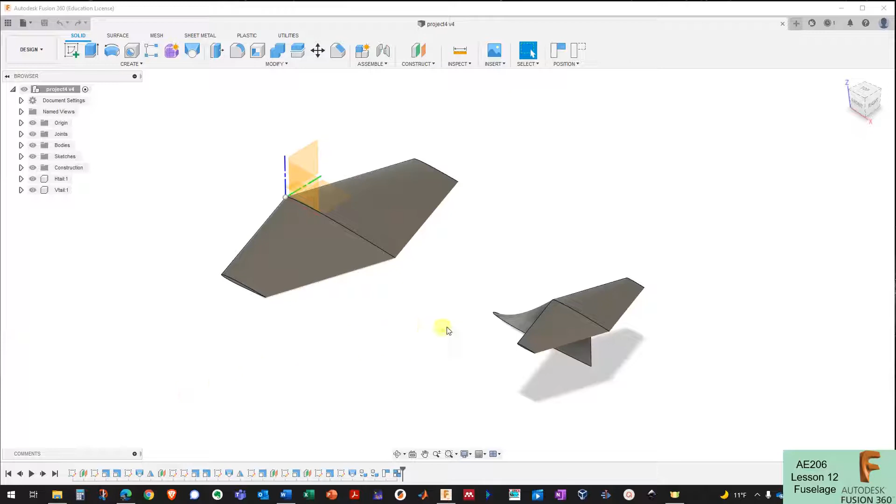This is part 3 of Project 4, where we're going to take the wing that we made in part 1 and the tail that we made in part 2, and we're going to add a fuselage and create something that looks like an airplane so that we can get it ready for 3D printing in the wind tunnel.

The basic tool that we're going to use to create a fuselage is the Forms tool up here, and we can click on this Create Forms button. We can click the plane that we want to create it on here. I'm going to create a cylinder, create the center of the cylinder, set the diameter, and then elongate the cylinder. This is the basic starting point that we're going to use to create our fuselage.

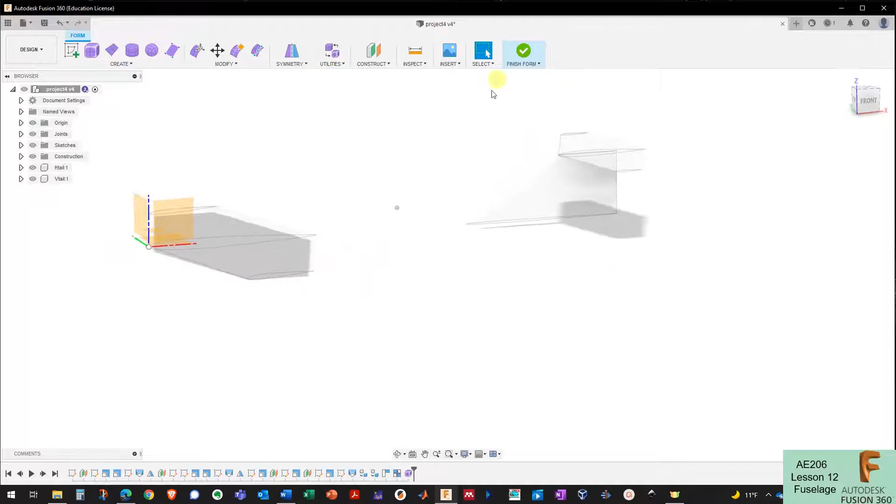Before I get into that though, I'm going to try to get my wing and my tail in a good position. I'm actually going to go for a replica of an F-104 aircraft, so I want to have some sort of reference to use to know where this wing and tail should go for an F-104 type layout.

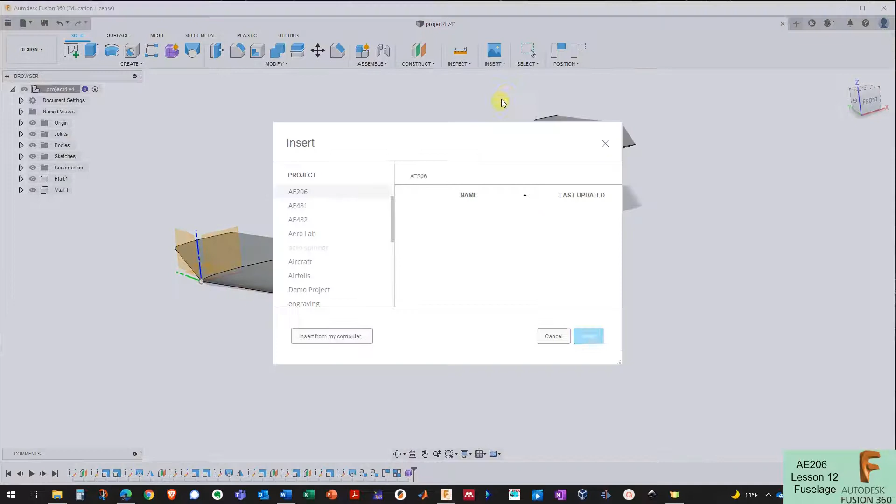I'm going to go up to the insert menu here, and I'm going to insert a canvas from my computer, and choose this F-104 3 view that I have here, and put it on this plane right here. I don't see that picture anywhere because it's really tiny, so I'm going to grab this scale handle here and drag it a few times until I start to see that thing get big enough.

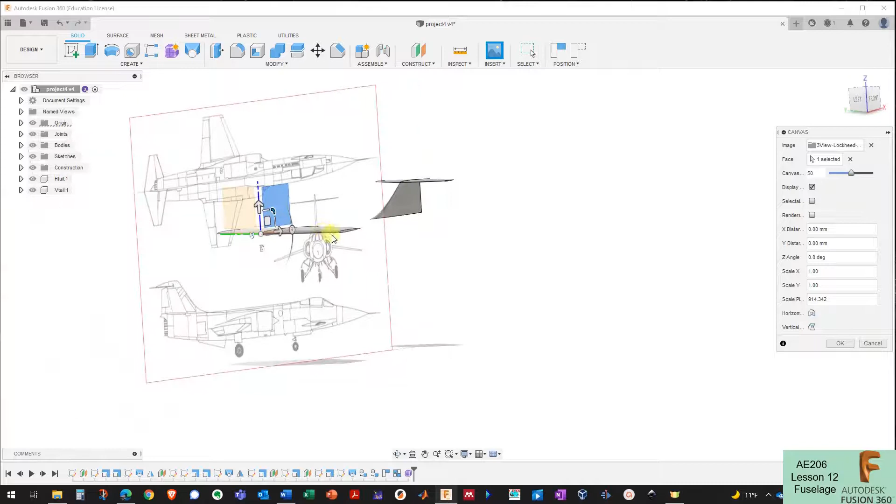I'm going to use it as an outline for sketching, and I want to flip it around horizontally so it's pointed the same way that my model is pointed. I'll press OK. Now the cool thing about this canvas is that we can calibrate it.

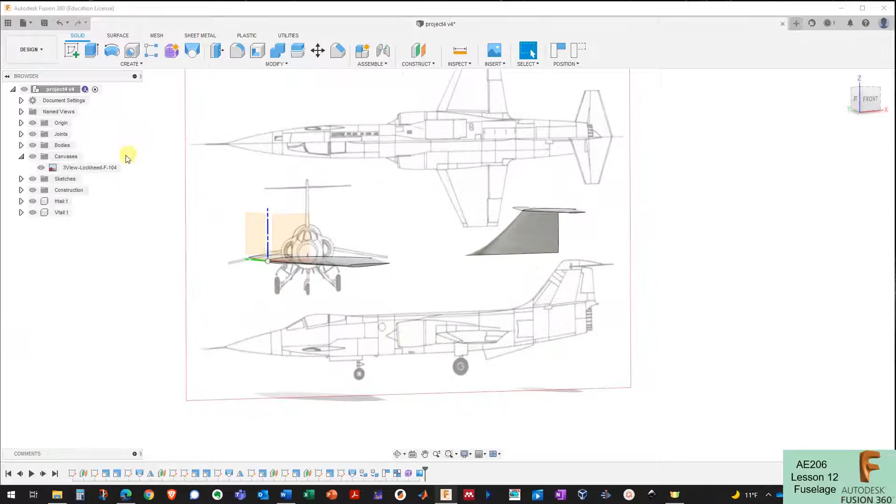You'll see I've got a new thing here in my model tree canvases, and here's my 3 view of an F-104. I can right click on this and click calibrate. Using a wingspan is a really good way to calibrate an aircraft.

I know the F-104 wingspan was 21 feet 9 inches, I'm going to call it 22 feet. So I'm going to click on one edge of the wingtip to the other edge of the wingtip, and now I can calibrate this canvas so that distance is a certain distance. I'm going to type in 22 feet. Close enough. Now I know this canvas is calibrated to a wingspan of 22 feet.

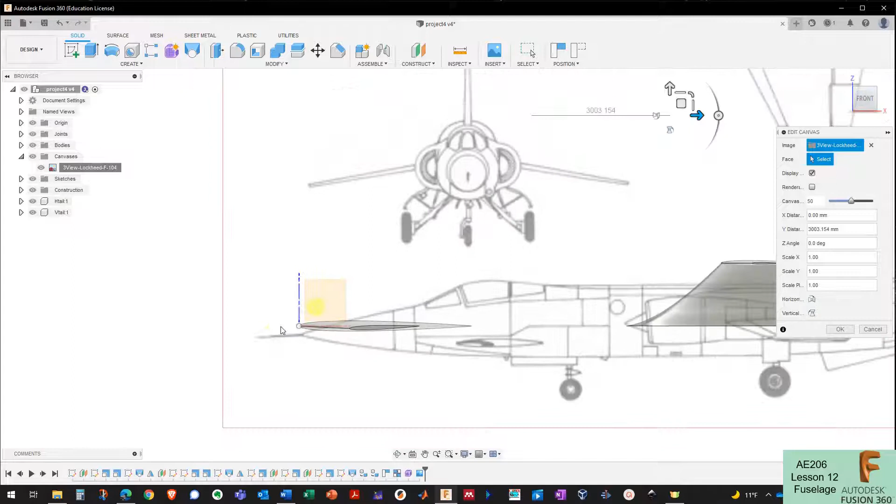So I'm going to right click on it, edit canvas now, and move it into position so the origin is somewhat lined up with the nose of the aircraft, probably before that boom. So right about there. Now I can click on my tail here, and move it into position just using my canvas as a guide, and put it right about there.

You can see now that my tail, now that I've got it lined up to my canvas, it doesn't look quite like the F-104 tail. I didn't do too bad with that curvature in the beginning, but it is a little bit shorter than the F-104 tail, especially at the tip chord. It's a little bit shorter at the tip chord as well.

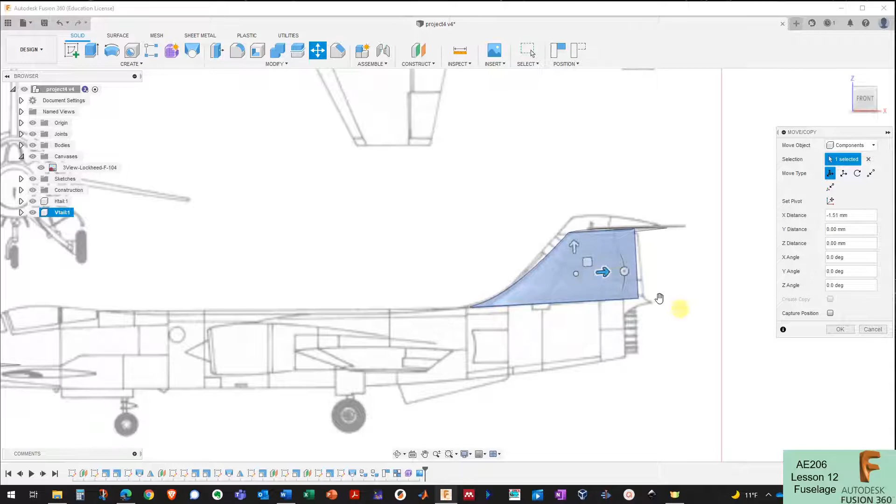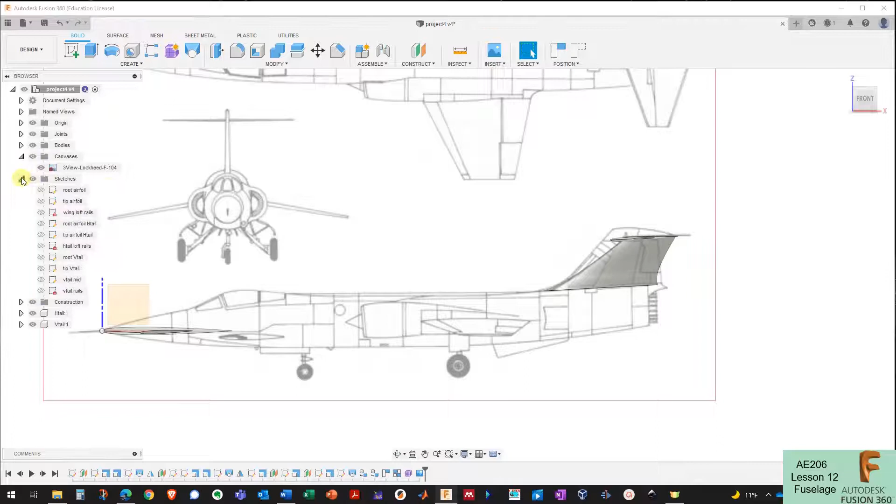So I'm going to line it up like that, and I'm going to modify, change parameters, and now I can change that tip chord of my vertical tail. So I had 4 1/4 feet here, I'm going to change it to 5, and it messed up the loft a little bit, so all I need to do is come back to sketches now and play around with this to fix it.

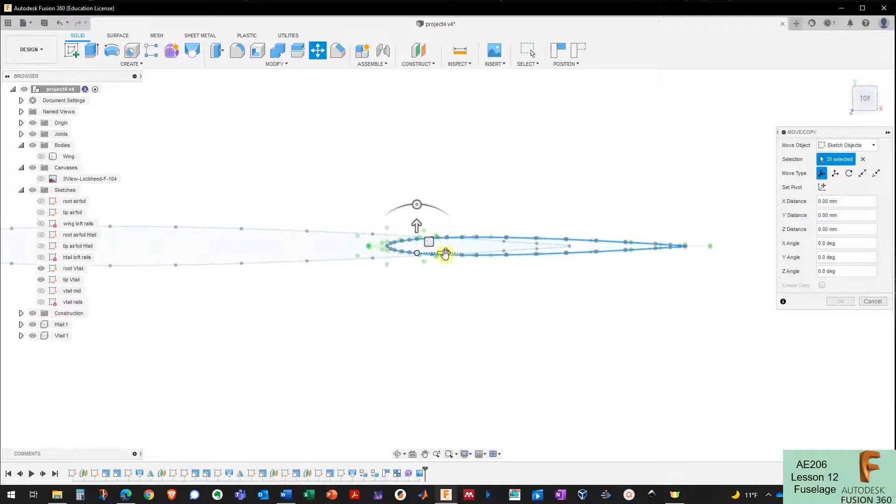I'm going to turn on my tip sketch and my root sketch, turn off my canvas for now, and turn off the wing here. Now I'm going to move this sketch so the trailing edge is lined up again right about there. Click OK, and now my vertical tail is looking a little bit better. I'll turn my canvas back on.

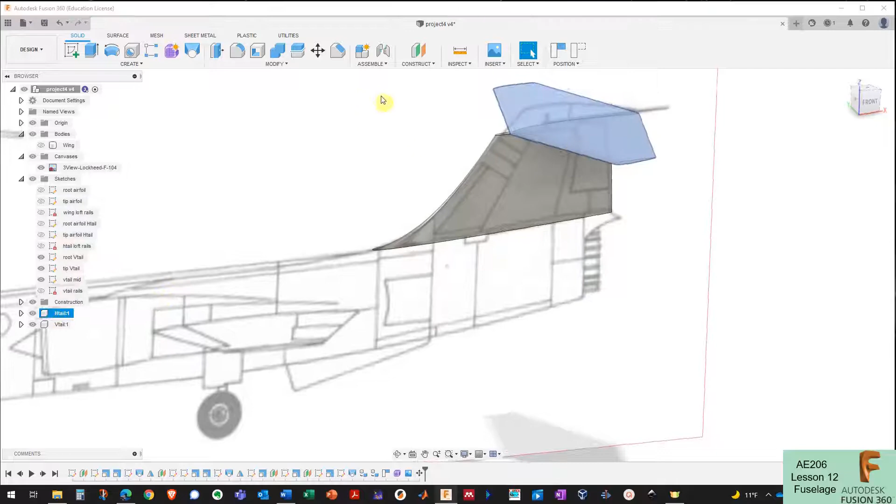Okay, so that's not looking too bad there. Now I just need to fix the top, the horizontal tail at the top. And to do that, I put these things in a rigid group. So I'm going to go back and delete the rigid group, select the horizontal tail, and try to move it a little bit.

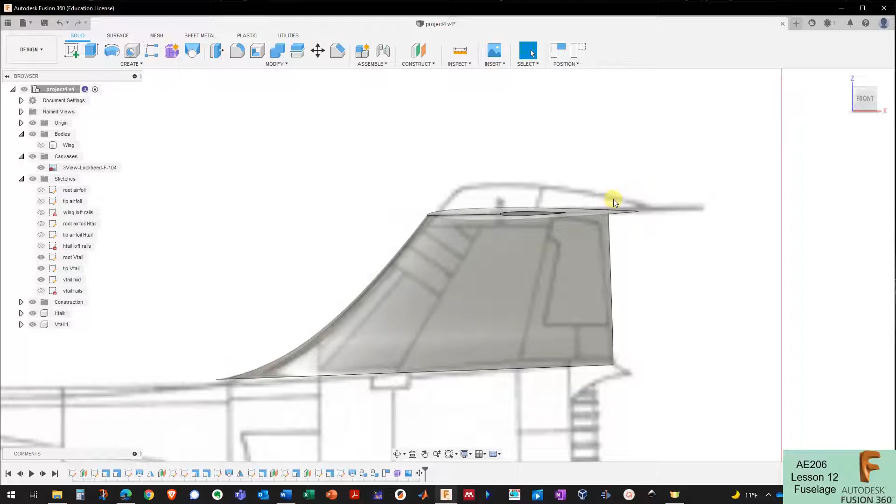Okay, so I've got the vertical tail lined up pretty well with the canvas. I'd have to find a way to model the top of this vertical tail. I could extend the vertical tail up and then use a sketch to cut off this curved shape, and then use some fillets around the top, and that'd probably be a pretty decent approach. For right now, that's going to be good enough.

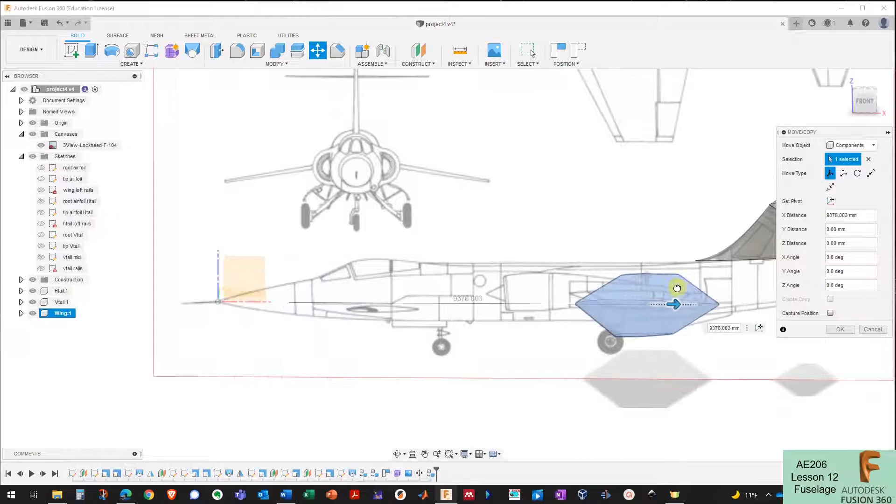The next thing I want to do is position my wing approximately correct. Right now my wing is still a body over here. I'm going to right click on this and create a component from the body. So now my wing is down here as a component, and now I can move it easier, and it retains its own origin and stuff like that.

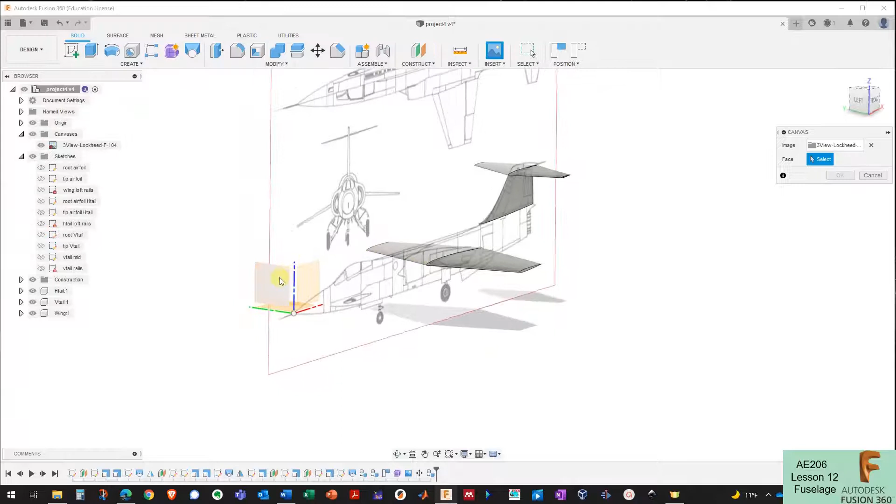So now I want to get the height of the wing right, and the anhedral, because the F-104 has anhedral. In order to do that, I really need a front view of the wing. So I'm going to go insert canvas, and insert that same drawing on this plane right here. I need to make it big enough to see, so I'm going to keep dragging this out until it's big enough. There I go right there. And I'm going to turn off the other one temporarily.

Now I'm going to edit this canvas just like I edited the other canvas, and calibrate this canvas. Okay, so I calibrated this canvas using this wingspan here because I know my wingspan was 22 feet. All I have to do is go back to my parameters and see that my half span of the wing was 11 feet, so the overall wingspan was 22 feet. So I know that's about right.

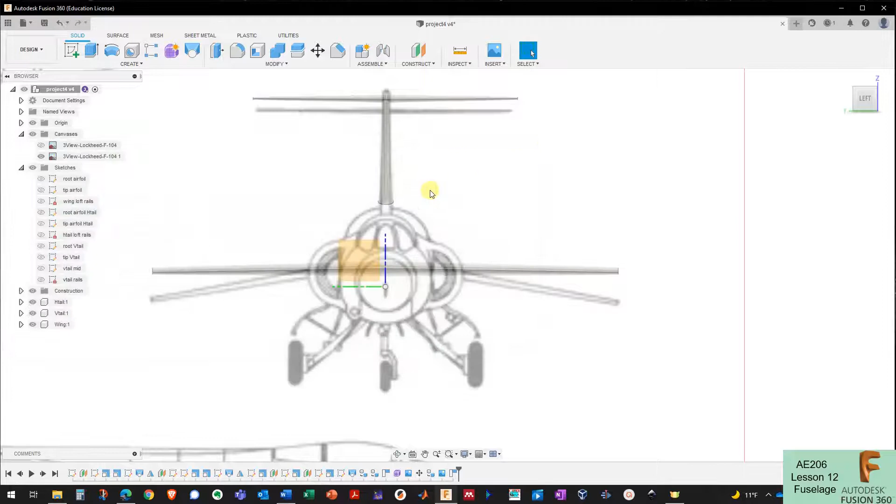And now I want to move this wing into position. So I want to get the wing root approximately right, and then correct the anhedral by moving the tip of the wing down. So I'm going to turn on my wingtip sketch, select it, click move, and move that wingtip sketch down until I get the anhedral that I'm looking for.

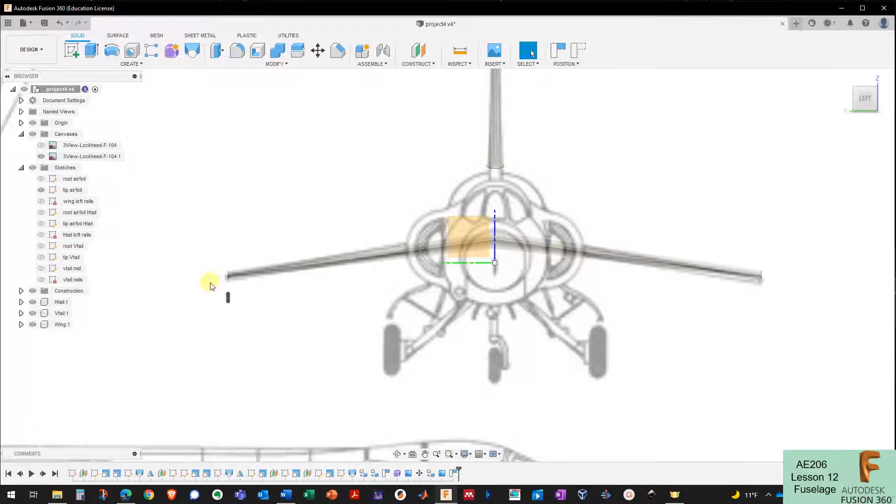It's just a matter of trying to match the canvas approximately, and that's looking pretty close right here. I'm not sure the canvas is lined up perfectly, but that does look pretty close. I'll go a little bit more on this side here, like that, and then I can actually move the wing.

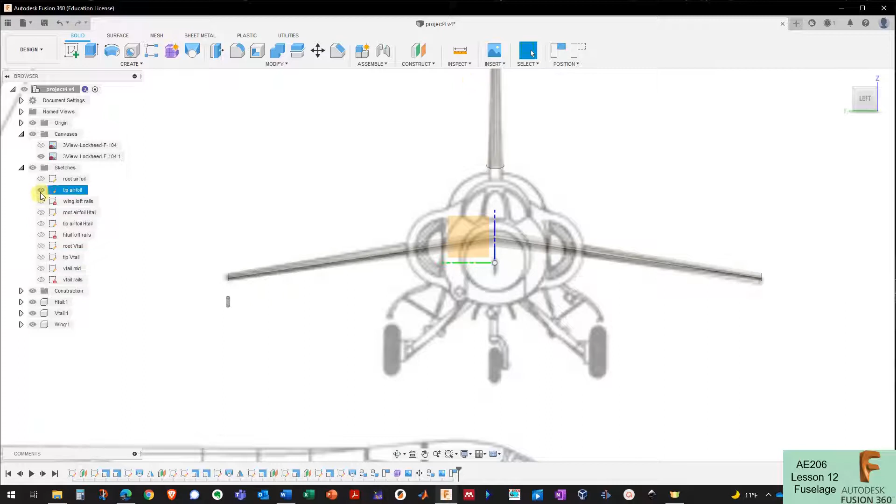I'm going to select components here, move the wing up a little bit, and I'll just tweak it one more time. Okay, it's pretty close to the anhedral there, so I'll turn off that wingtip sketch. So that's the wing placement I'm looking for in terms of the anhedral and the height of the wing.

Now the other thing I want to do is make sure the wing is lined up to the x-coordinate where it needs to be on the fuselage. So I'm going to turn off that canvas, insert another canvas, and use that same drawing because this is my one reference drawing. I'm going to insert the canvas on this plane right here and make it bigger.

I just need to calibrate this canvas. I'm going to make sure I have a perpendicular top view, then calibrate this to be 22 feet and move this canvas into position where I put the nose on the origin as well. And for my nose here, I'm just using the tip of the nose before the boom starts.

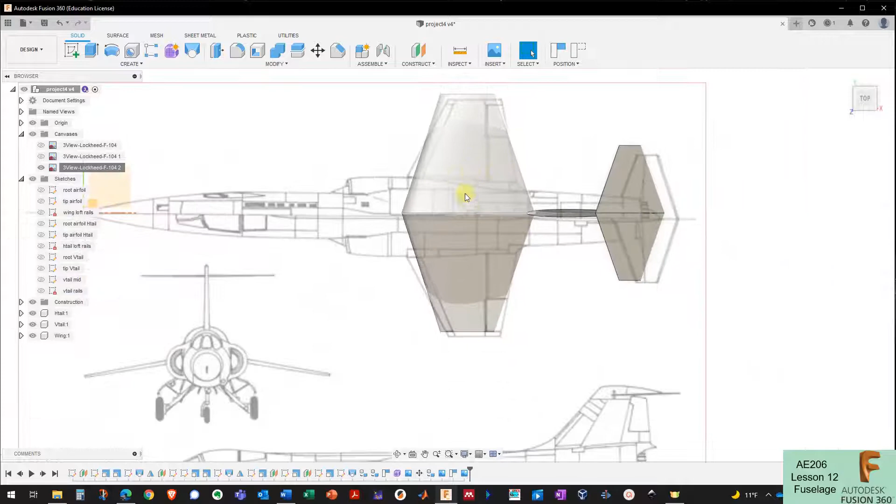So right about there. Okay, and now I can position my wing and kind of match it up with the F104's wing in this direction. And once again, it looks like the canvas is not lined up perfectly. So I'm going to edit the canvas again and move it so at least the midplane of the canvas is lined up with the midplane of the wing. My 22-foot wing is matching the 22-foot scale on the canvas.

And now I'm looking at my wing, and I think it needs to move forward a little bit. I think the root chord needs to become bigger to try to fix that leading edge sweep. So I'm going to change parameters, changing my root chord to 12.3 feet.

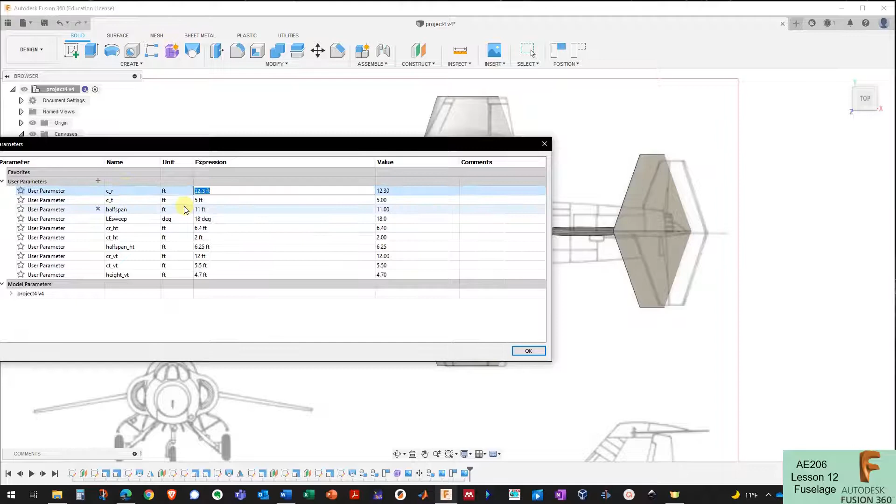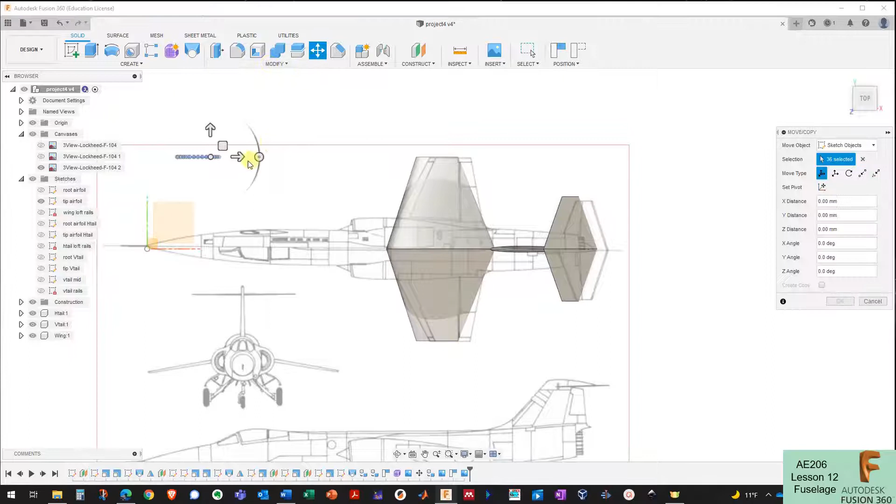Then I'm going to move the wing forward by clicking here, right about there. And now I need to change that tip airfoil sketch again. The tip airfoil sketch is showing up over here because that's where the original drawing was, but I'm just going to move it back knowing it will change the sweep on this wing, and that was pretty close.

And I think I can bring that root chord back a little bit. But I'm going to move the wing forward first. Yeah, I don't know, I think I'll just keep moving that sweep back.

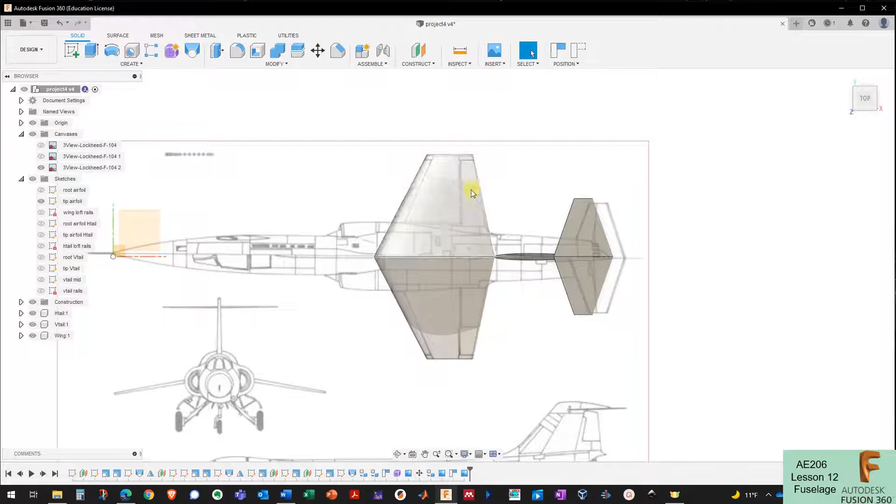Okay, that matches up pretty well with the canvas in terms of the wing placement in this plane, the XY plane, and the sweep and the wing span. If I turn off this canvas and turn on the canvas that's in the YZ plane and look at it from this direction, the wing lines up in terms of the height and the anhedral very well. So I'm pretty happy with the wing placement here, and I'm pretty happy with the tail placement.

I'm going to turn off that sketch that's showing, and now I can get started with inserting a fuselage here, a form, and trying to create the fuselage of the F-104.

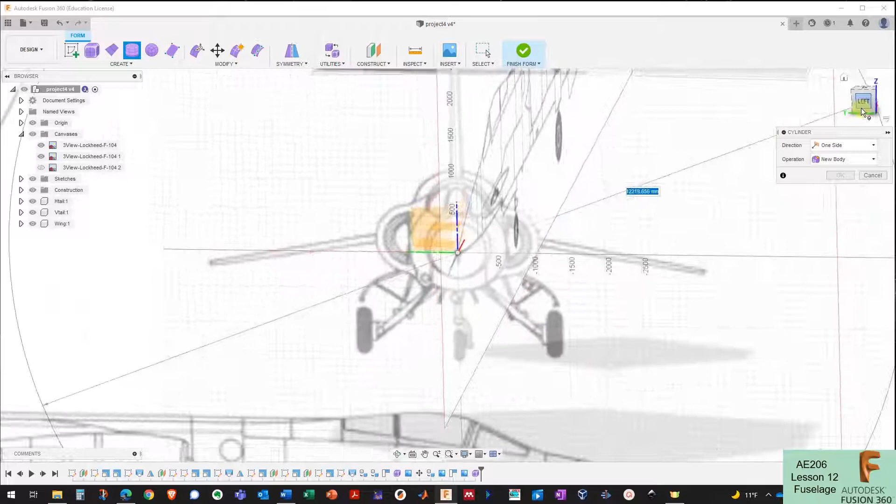So I'm going to go to Create Form, click on the cylinder button to create a cylinder. I'm going to click on the plane. I want to sketch the diameter of the cylinder on, and I want to turn on the 3-view drawing that has my front view on it, so I can get this diameter to roughly match the diameter of the aircraft. I'm going to force it to rotate the view by clicking on the corner of the view cube here, and I'm going to turn off that second canvas, and now I'm going to drag this fuselage back right about there for now. And now I've got my basic fuselage form.

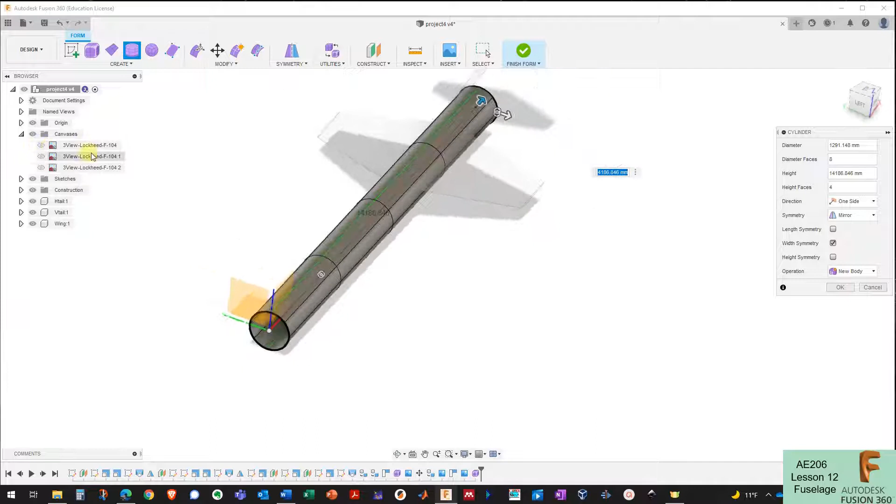Okay, now a couple things we need to make sure that we have set before we click OK here and create our body. First of all, I have these segments here in the X direction lengthwise, and I want a lot more of those because I want to be able to control the shape of the fuselage a little bit finer. So I'm going to put in 15 faces in that direction, and I can turn on symmetry as well.

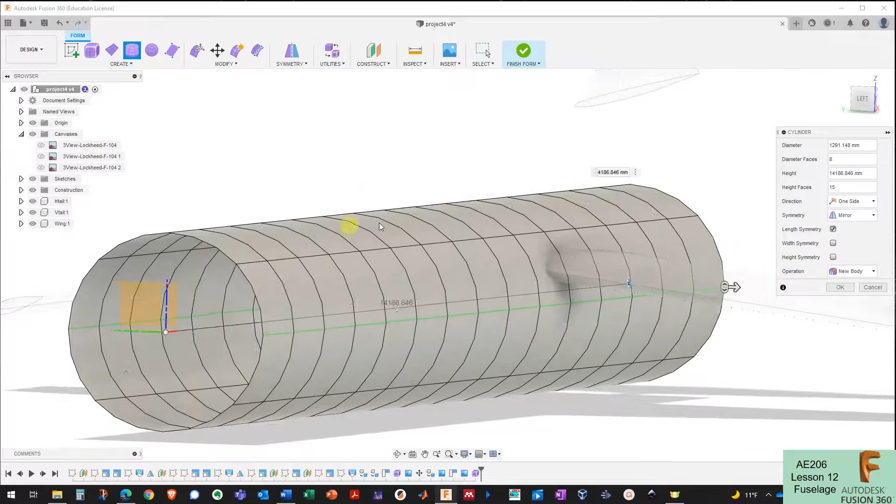Now there's obviously three planes that I could be symmetric about. If I clicked on length symmetry, I see that this line here is colored differently, so the top of this fuselage is going to be symmetric with the bottom. That's not what I want. If I click on height symmetry here, I see that this one is highlighted, so now the front of the fuselage is going to be symmetric with the back. That's not what I want either, so I click on width symmetry, and this is the symmetry that I want. So the left-hand side will be symmetric with the right-hand side.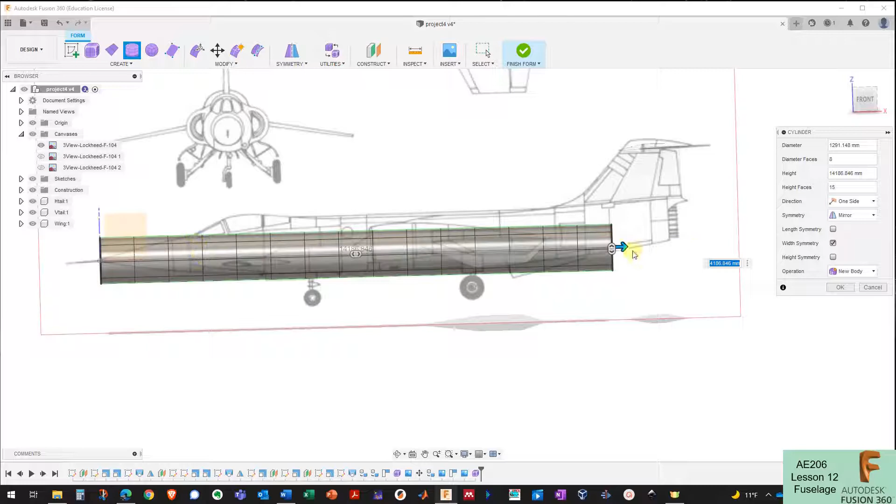So that's what I want there, and I'm going to make sure I have this roughly correct, and I know it's not full length, and that's because I'm going to move the whole thing back, probably line it up with this bulkhead of the aircraft here before I get started on too much. So I think I'm close enough now to press OK on this form.

And now I've got this fuselage form here, and I can get to work on shaping it into the fuselage. I'm just going to move it back for now and move it up slightly so it's level with the most part of the bottom of the fuselage.

Okay, so when it comes to forms, we basically have three main components of the form that we can manipulate. There's the face, and I've got a face selected here, and you can see when I select this face, because I've got this symmetry defined along that plane, it's also highlighting that the other face will be affected by anything I do to this face. So that's a face. There's also edges, so I can select the edges between two faces, and same thing here, it indicates that symmetry is on.

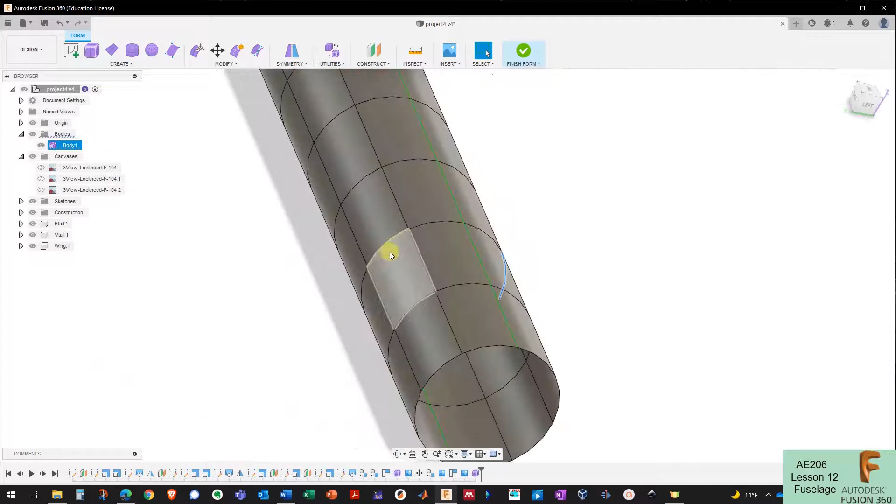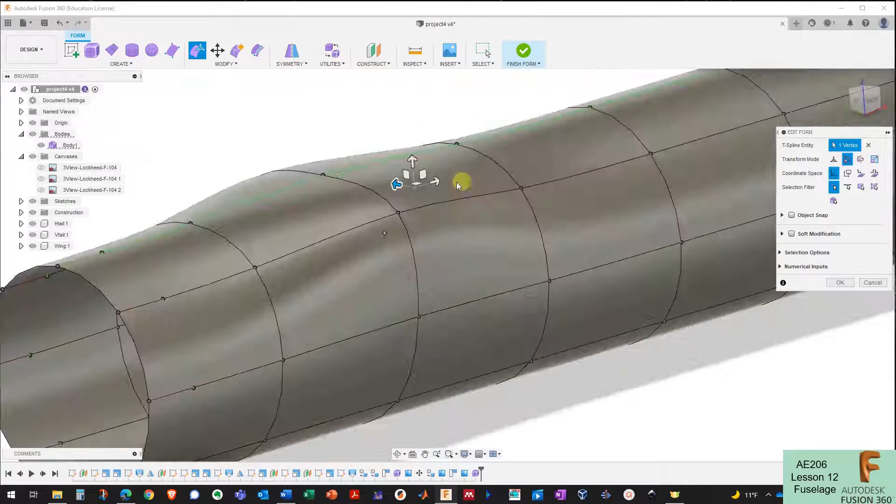And there's also vertexes, and I can select the vertex of these four faces here, and I can manipulate this vertex. No matter which one I choose, after I select it, I can come up to the Edit Form command, and now I can manipulate this by dragging, rotating, or scaling this component that I have selected.

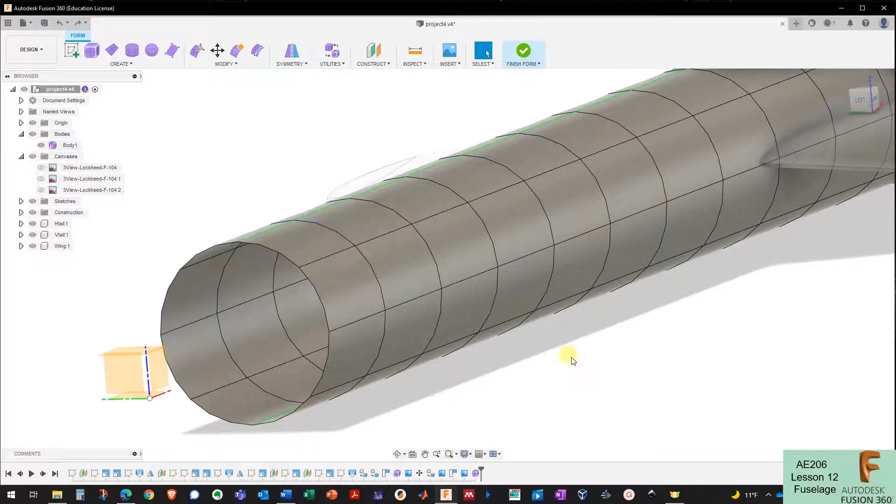In this case, I can't scale it, but you see whatever I did to this vertex, it did it in a smooth fashion, creating a smooth body, and it did it symmetrically about that XZ plane. So I'm going to cancel that and undo the change by pressing Control-Z, because I'm not ready to get into that quite yet.

The other major operation I can do here, and there's a lot of them under the Modify menu, you can just read about them and read the description to see more about what they do. But this crease one is important, because I could select some edges like this, and that creates a sharp crease there.

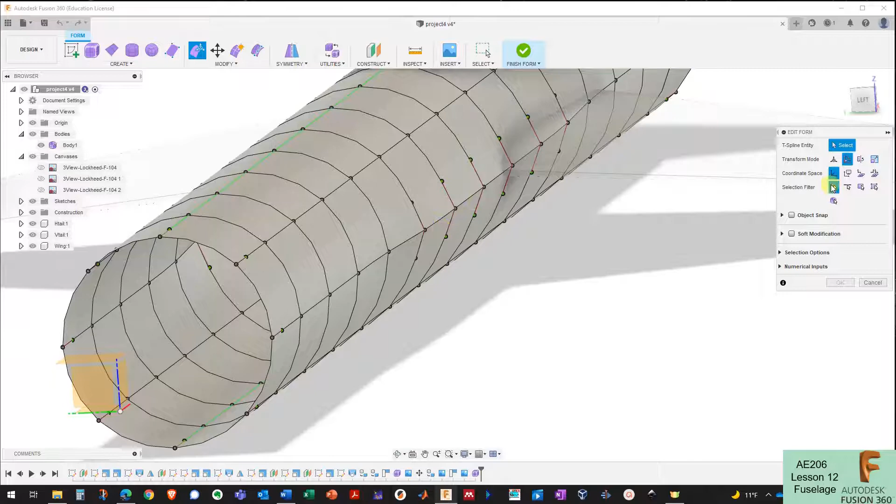I can select that crease, and right now I have my selection filter set to vertex, so it's highlighting all the vertexes I can select, but I can't select any edges, and I want to select edges. So I'm going to choose edges over here, and select these edges that I just creased by holding down the shift key.

Now I can pull those edges out, and you can see I'm making a chine for my aircraft. So if I wanted a chine on my aircraft, that would be the right way to make it, by creasing that edge and then manipulating it out. You could pull that chine forward or backward, whatever you wanted to do. That crease command is a powerful one. I'm going to undo that crease because I don't need it right now.

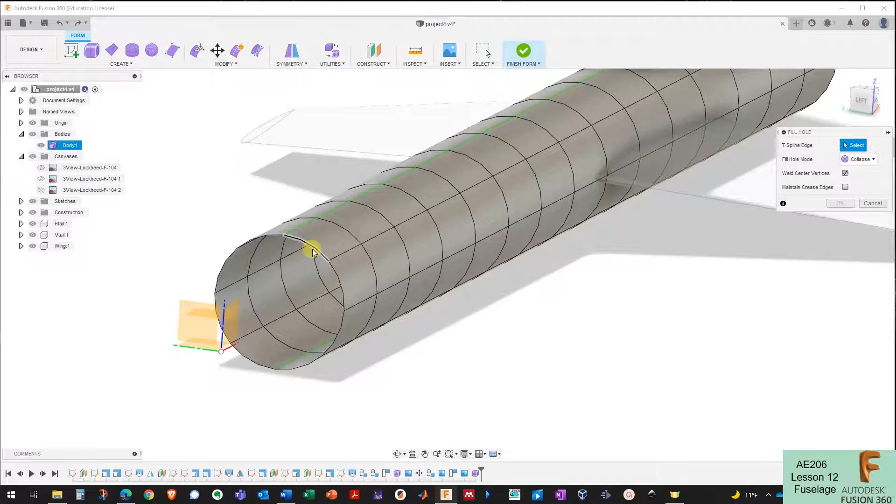Now, this cylinder is really just a surface right now, it's not a volume, so I need to close this in and turn it into a volume. I can do that by going to the Modify menu and saying Fill Hole, and I select an edge along this hole, and it automatically fills the hole.

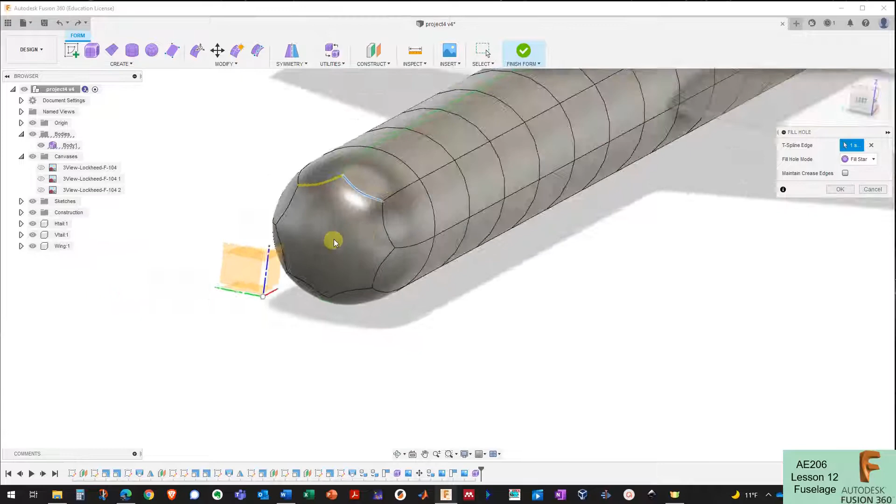Now it's very important that I choose the right method of filling the hole. There's three options: this Reduce Star, which kind of just nubs it over; the Fill Star, which is probably the most robust way to fill a hole, just because this shape doesn't result in any triangles. Triangles can get you in trouble when working with forms, and can cause a really jagged, unsmooth body.

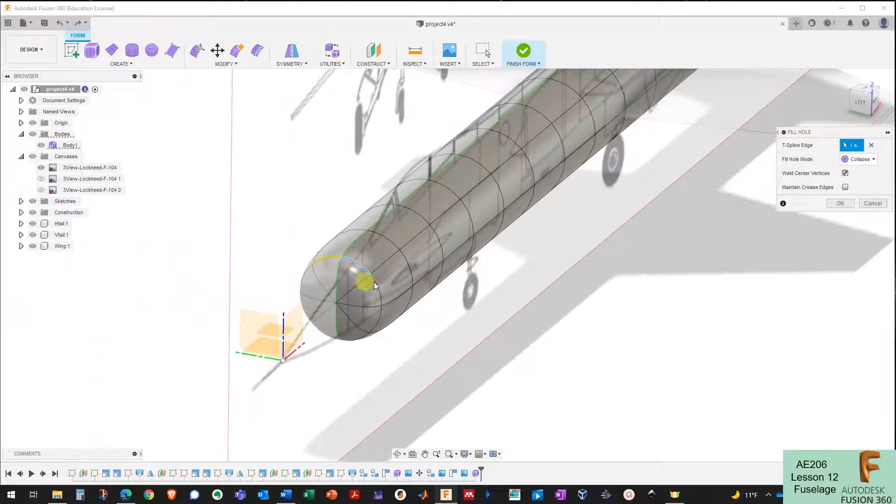Or there's this third option, Collapse, which results in triangles. But in this case, I need triangles because I want to pull the nose of this fuselage out to a point, so I want this Collapse option here. I'll press OK, and now I've got that side of the fuselage closed up.

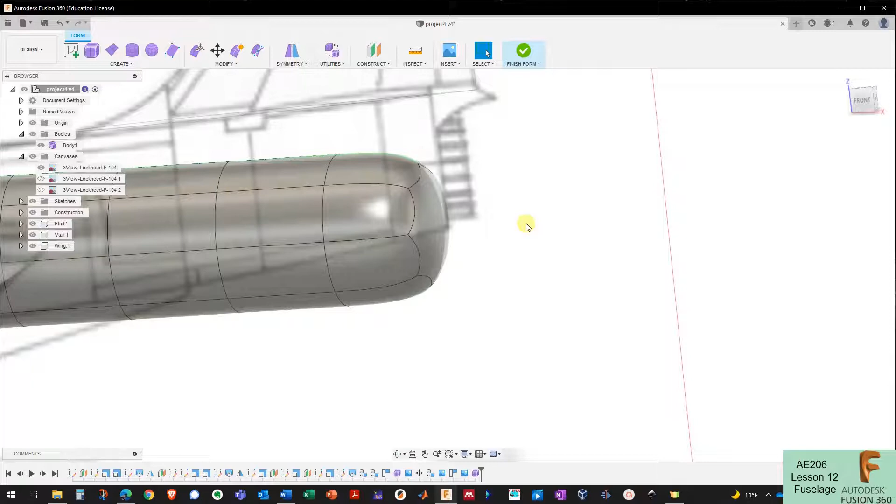I'm going to come over to this side, say Modify, Fill Hole, and click on an edge there. I want this one to be a little bit more robust, so I'll do Fill Star here, so I can manipulate it better without getting into a situation where I have vertexes crossing over each other, not lined up. That can be a tricky situation to fix.

Okay, so I've got my fuselage-looking thing here right now. It kind of just looks like a hot dog for the time being, but I can start manipulating this and turning it into something that looks like my canvas behind it. I'm going to do that now.

The selection box here comes in handy. I have window selection turned on, and if I drag from left to right, I'm only going to select the things in the box, whereas if I drag from right to left, I'm going to select everything that's touching my selection box. This is a really handy thing to keep in mind.

I'm going to select these two for now, and pull those back to right about there. That should be good enough for now. And now I want to pull this vertex out and make the pointy nose on the end.

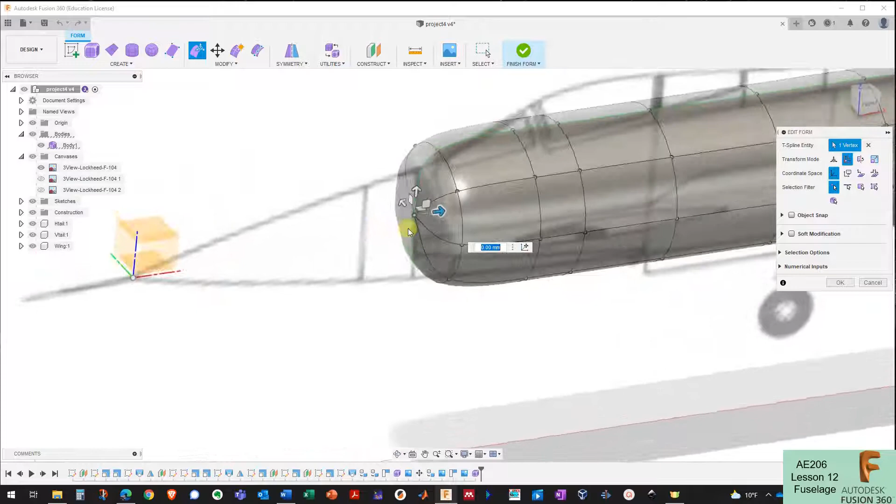So I'm going to go to Edit Form again. I'll turn on my selection filter to select vertex, and I drew a box over there, so I only selected the things inside the box. Now I can pull that out to make it kind of match up the nose of the canvas, and drag it down a little bit, and that's kind of a good point where I want that.

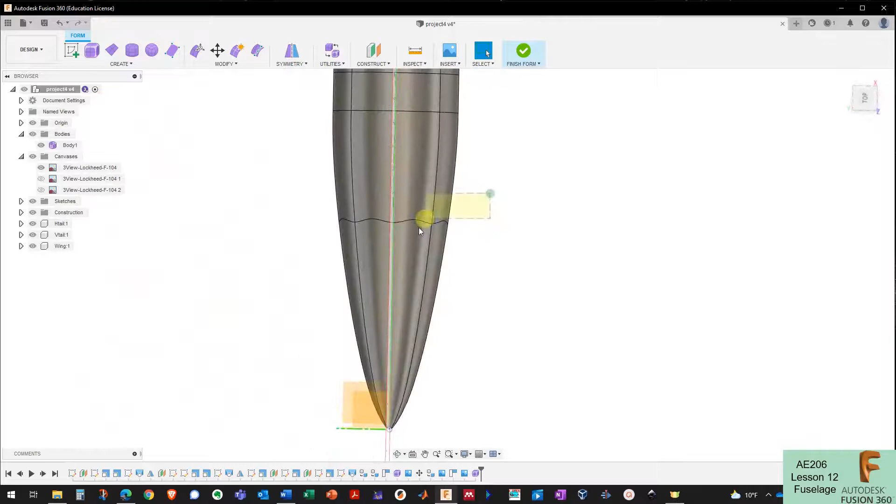Now I can check out these faces here, and I see they're all kind of wide right now, and I want to pull those in a little bit and make the nose a little bit tighter. So I'm going to select these here, and move those in.

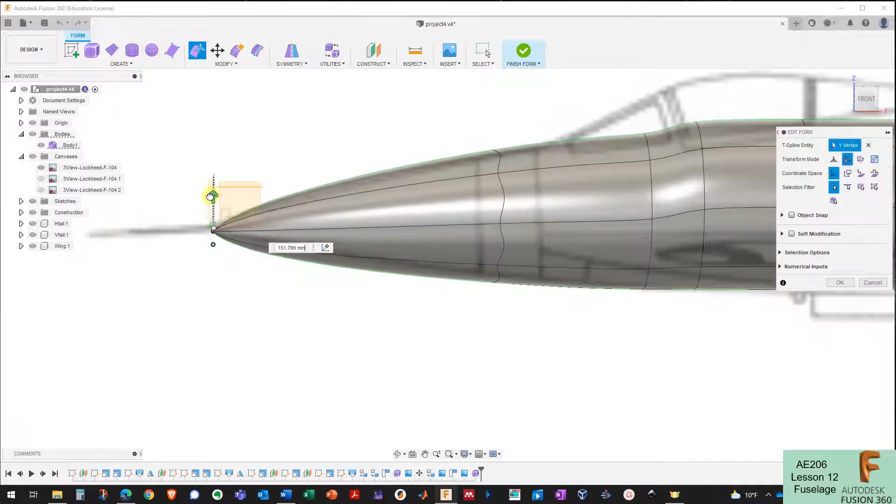Now I'm going to select the ones on the top and move them down right there. And now I'll select the vertex here and move that back up to where it needs to go.

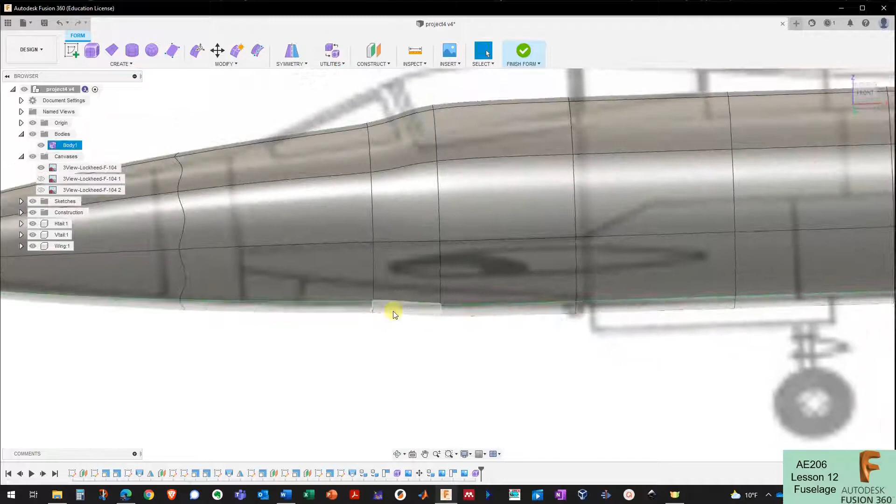It's not terrible. Okay, and now this is bent the wrong way here, so I'm going to select this edge, move it out a little bit to smooth that out, and we've got the nose of the aircraft approximately right.

Now I want to focus on the middle section of the fuselage here to there, and move that up until it approximately matches the top of the fuselage right there. Okay, so that's got the middle of the fuselage approximately right.

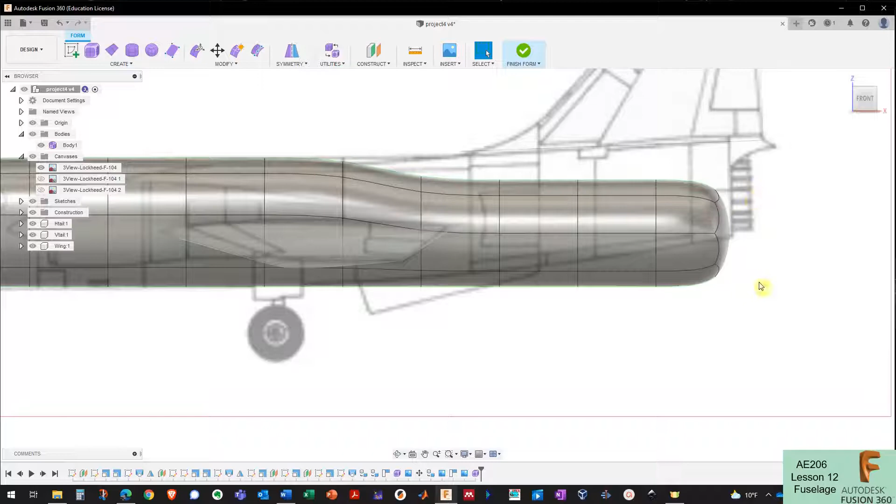Now the back end of the fuselage - I've got to do some thinking about this because the back end has this curvature towards the back. There's a different cylinder here that's the exhaust of the engine, a different diameter and stuff. So I think I'm just going to try to model this part with this spline, with this curvature coming back. Then if I wanted to, I could come back and put in another cylinder to model the exhaust. So the first thing I want to do is get this section approximately in the right area.

So I'm going to highlight it like this and click on Move. I'm going to move it up, and I want to do a free transformation here where I can also rotate it. I'm going to extend it past the end of the fuselage because I'm going to bring this end back inside of itself to make a clean hole at the end there. So that could be good enough for now.

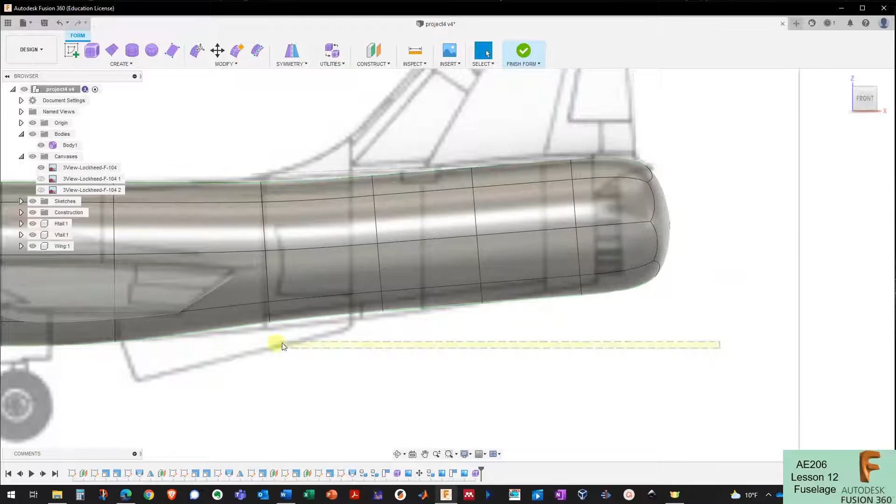And now I want to pull down on these faces here. I don't like how many faces I selected there, so I'm going to pull down on these ones instead. There we go. And rotate those a little bit. Yeah, that's pretty close. Okay.

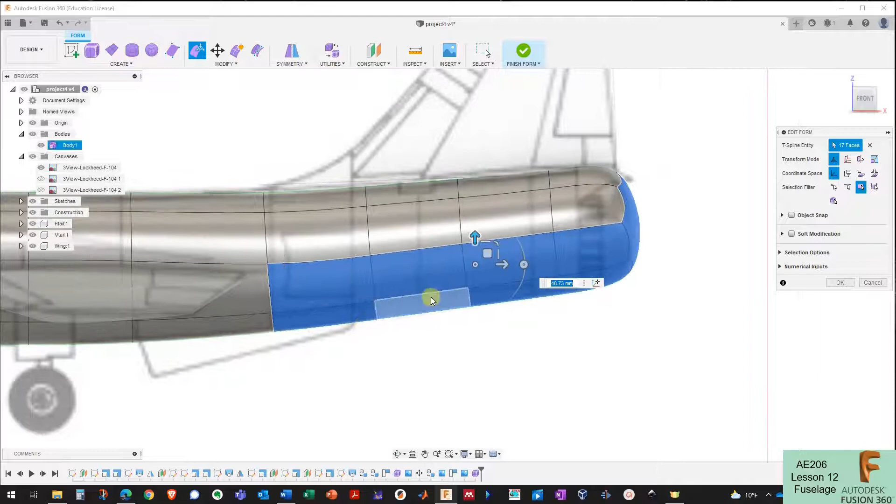And now I'm going to select these faces on top, and I'm going to pull up on them until that's approximately matching the canvas a little bit.

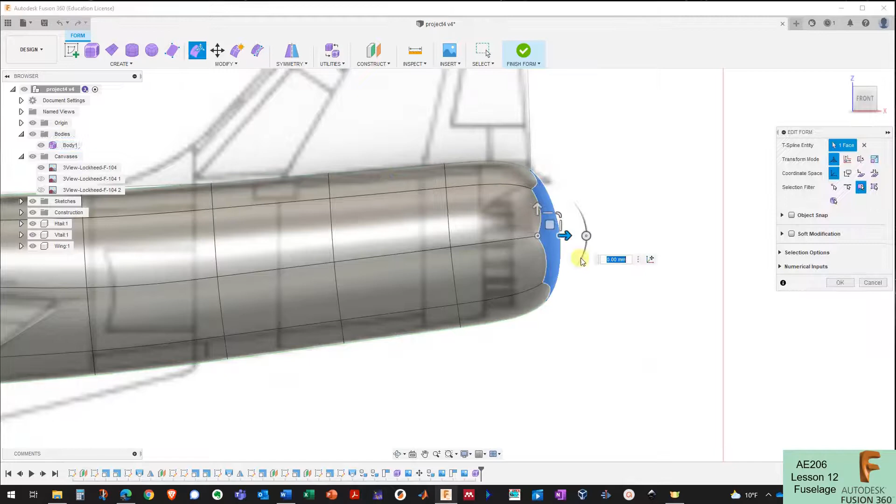Okay, now for the end of this fuselage, I can select this fill star that I had here, and I can take it in on itself like this, and that creates a nice way to close off that volume, and that's going to look pretty nice 3D printed. We wouldn't want to try to model it hollow on the inside anyway, so that's a pretty nice way to finish off the fuselage there.

And now I just need to lengthen this back out to match it up to the actual end of the fuselage. So I'm going to select this, and now I just need to rotate this there.

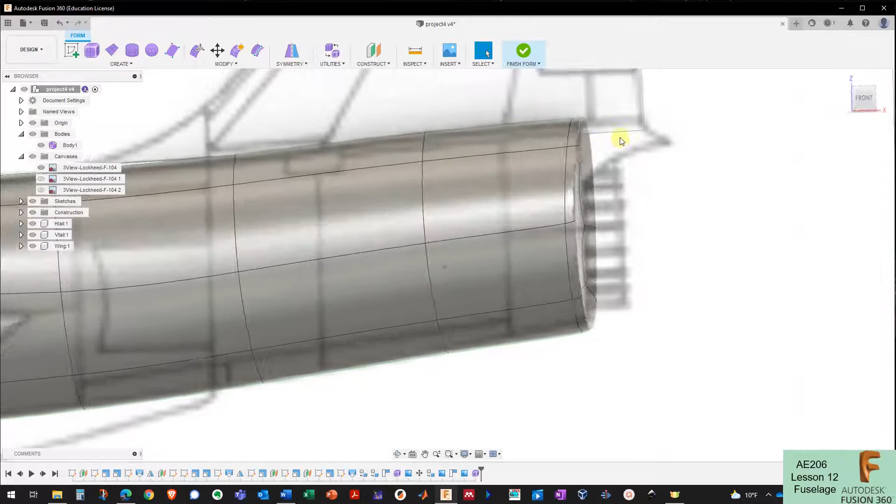Okay, so that's getting me closer, and now I just need to figure out how to make this kind of curvature coming out the back of the fuselage.

And I'm going to select faces again. Actually, I might try to select edges here to see if I could be successful selecting this edge and just pulling that out like that. And rotating - I don't want to rotate that too much because that could collapse in on itself and give me some issues. So we may not be able to get it all the way.

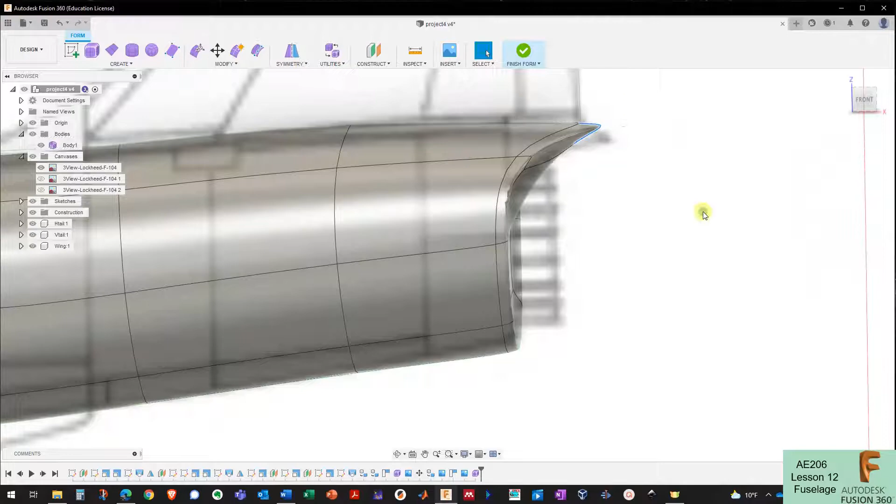Okay, so that's pretty good, but now I've got this kind of weird bulge sticking down here, and I'd like to try to take care of that a little bit.

So I'm going to click on Edit Form. I'm going to click on Vertex this time. I'm going to click on this vertex, and I'm going to drag this vertex in.

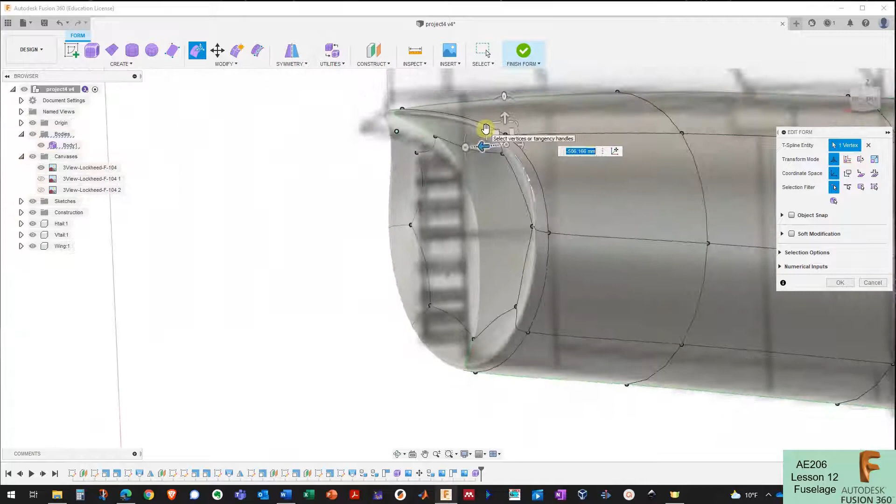Okay, yeah, it's not terrible. It definitely captures some of the feature that the F-104 had. It's kind of hard to see from a canvas, but you can always pull up a picture of an F-104 or whatever aircraft you're trying to make and take a look at it. I obviously didn't capture that whole length of it, but I got a little bit of it. So, okay, that doesn't look too bad right there.

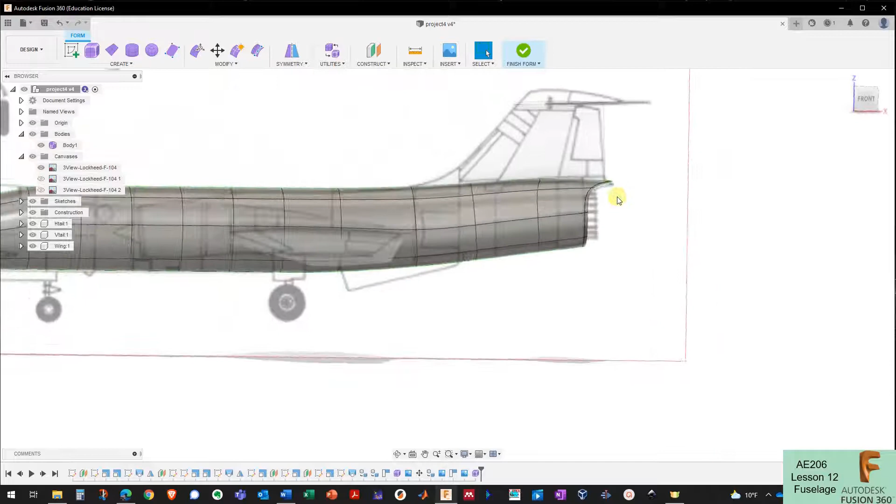I'm capturing the height of the fuselage along this, and I can just turn the canvas on and off to get a better view of it.

The last thing I need to do here is fix the cockpit. To do that, I'm going to go to Edit Form again, click on the edges, and select these two edges here that make up most of the cockpit, then drag them up.

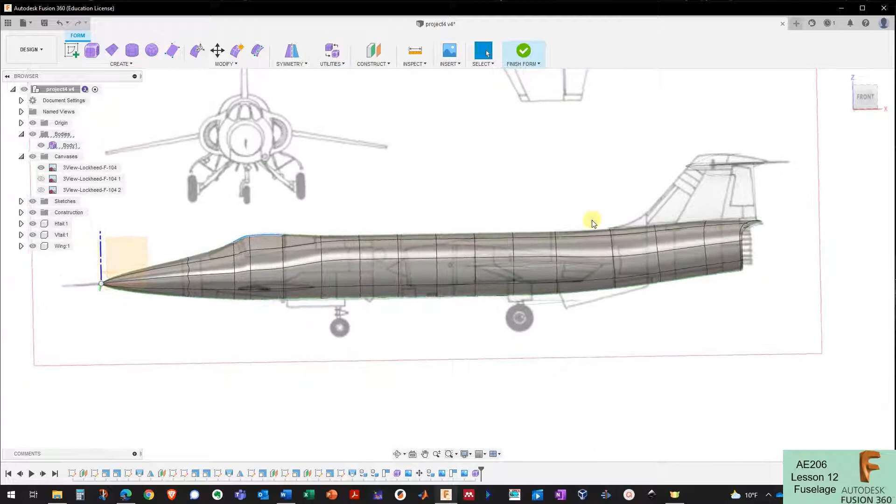That is actually pretty close. I like that a lot. Now I've captured this kind of profile of the F-104.

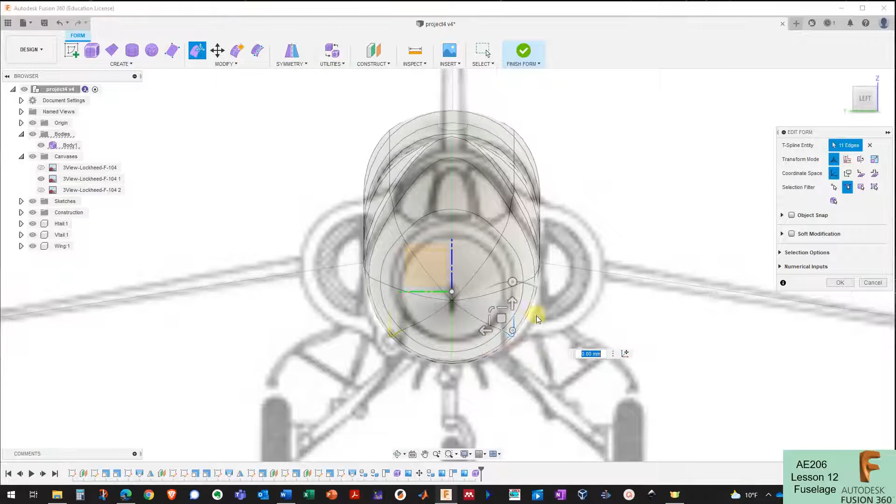But I'm going to take a look at it from my other sketch view, the other canvas view. It's not too bad from this either. It looks like this bottom of the fuselage here should actually come down a little bit, and it looks like this area here should come out a little bit.

There we go, and it's not too bad in that direction either. The only thing I don't care for is kind of this bulge here along the cockpit.

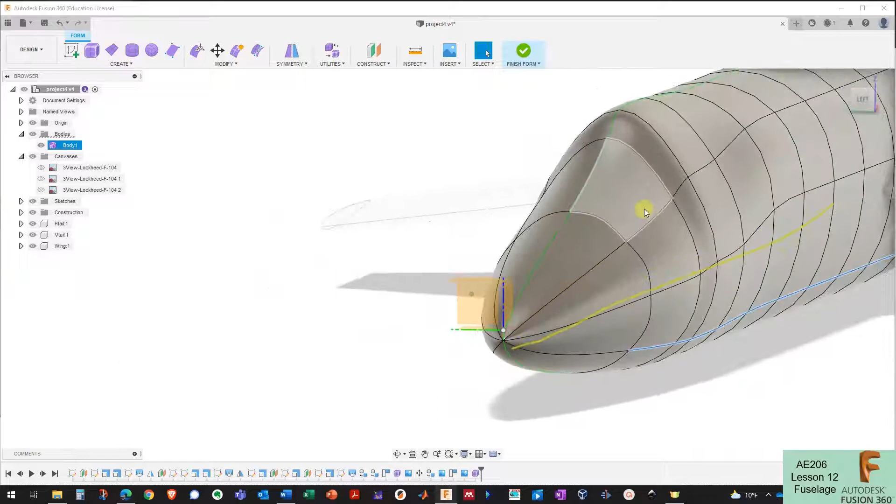Looking at a picture of the F-104, there's probably a crease along here where it's not totally smooth, where the fuselage transforms into the cockpit. So I could try to crease this. In reality, that probably doesn't matter too much for small 3D printed aircraft, so I'm just going to select this edge here.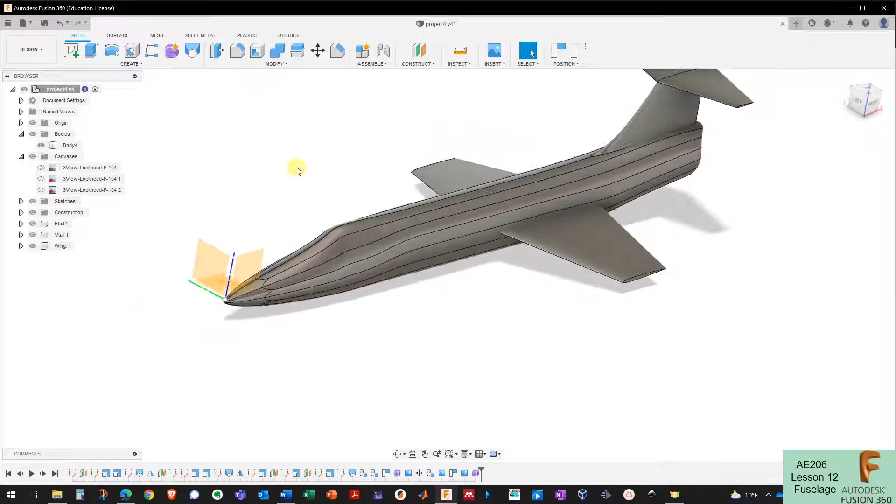Okay, it's not the worst F-104 fuselage ever made. I'm going to click Finish Form, and now my form is just a solid volume, another body that shows up in my list, and it kind of looks like an F-104 — the world's first production Mach 2 aircraft that held simultaneous airspeed, altitude, and time-to-climb records — made in just a few minutes by putting the canvas on and using forms to manipulate the fuselage to what I wanted.

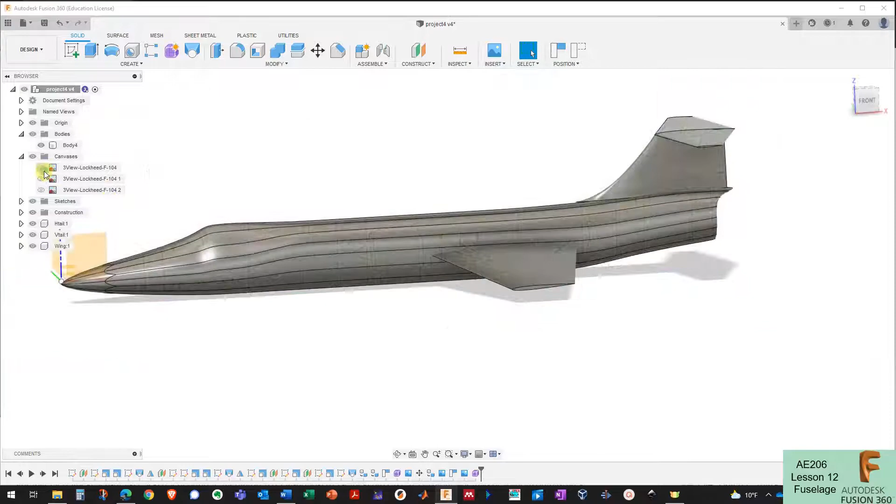I can come back in and add another form here to account for this inlet for the engine, and then I really should come back in and add a couple more to account for this curvature.

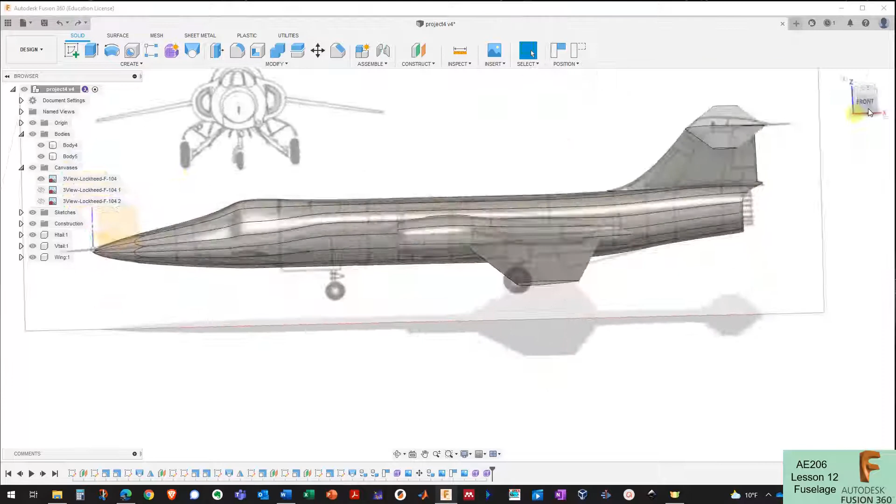Okay, so I've got my inlet here, looking somewhat decent. I'm just going to compare it to my canvases. On this canvas here, I'm going to go back into edit mode so the fuselage is grayed out.

Looking at the front view here, it appears to mostly match up. And looking at this top view, it also appears to mostly match up. So I'm going to click on Finish Form.

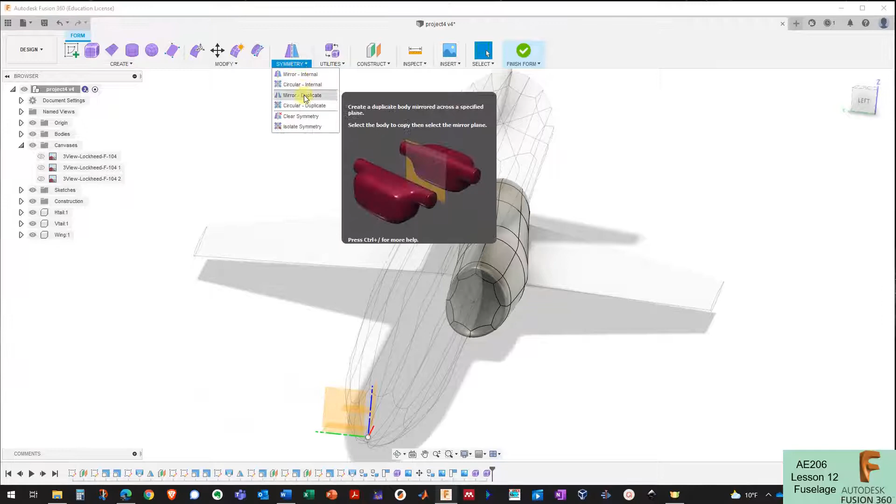I'm going to turn off that one, and now I just need to create the same inlet on the other side. So if I right-click on my form again, go to Edit, click on the Symmetry menu and say Mirror Duplicate, I'll create a duplicate across a mirror plane. I click on the body I want to duplicate, click on the mirror plane I want to duplicate across, and now I have my two inlets on either side of the fuselage.

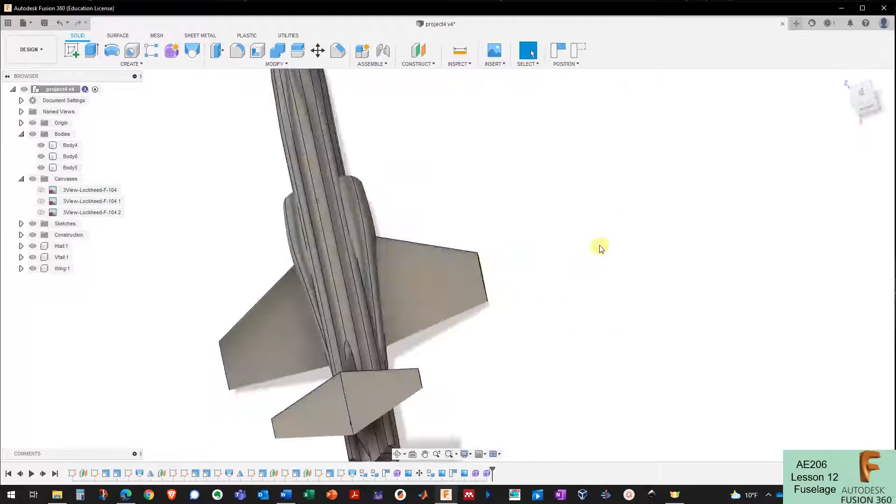Press OK, then Finish Form, and now I go back out and I've got my two inlets going back into my engine, and it doesn't appear to be half bad. Now I do need to create the cone coming out of the inlet, and I could use another form to do that as well.

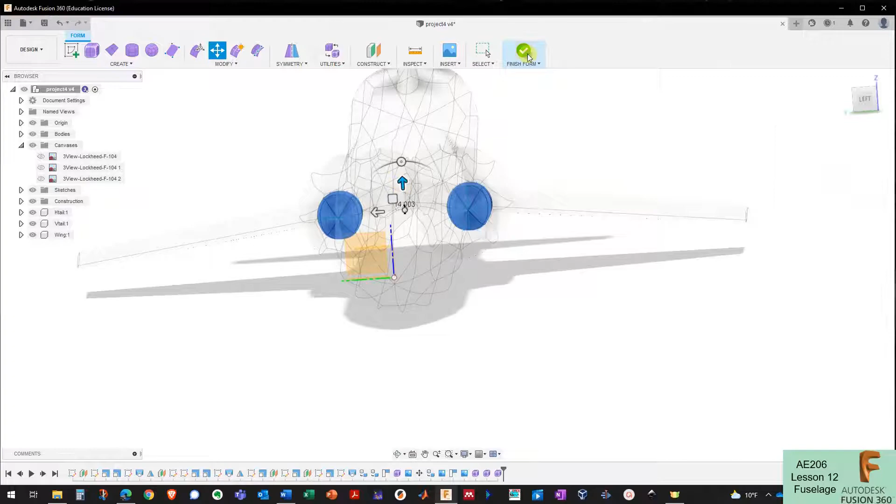Okay, and there's an attempt at the F-104's inlet cone. Looks a little bit high — I can still tweak it a little bit, but you get the gist of that. Basically, the F-104 didn't have variable inlets or variable geometry inlets, just a fixed inlet cone right there.

So, I don't think I need to model the exhaust pipe here, because in the next video I'm going to cut this out to mount it on the sting balance in the wind tunnel.

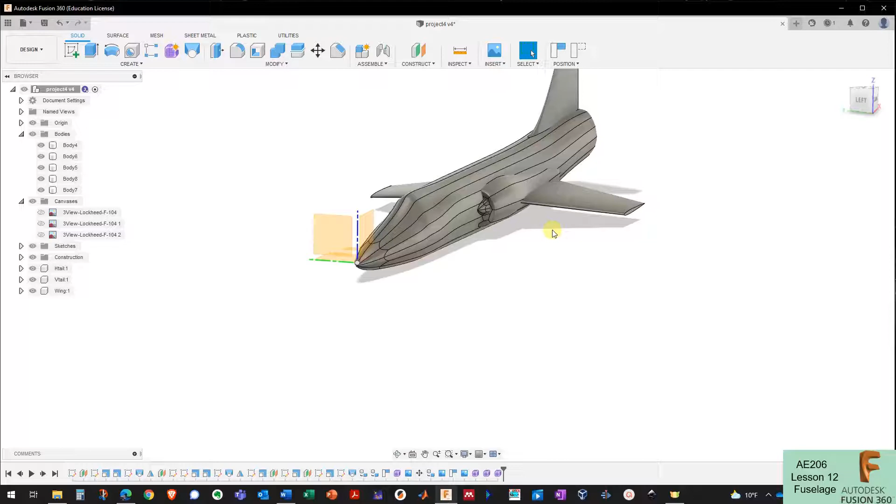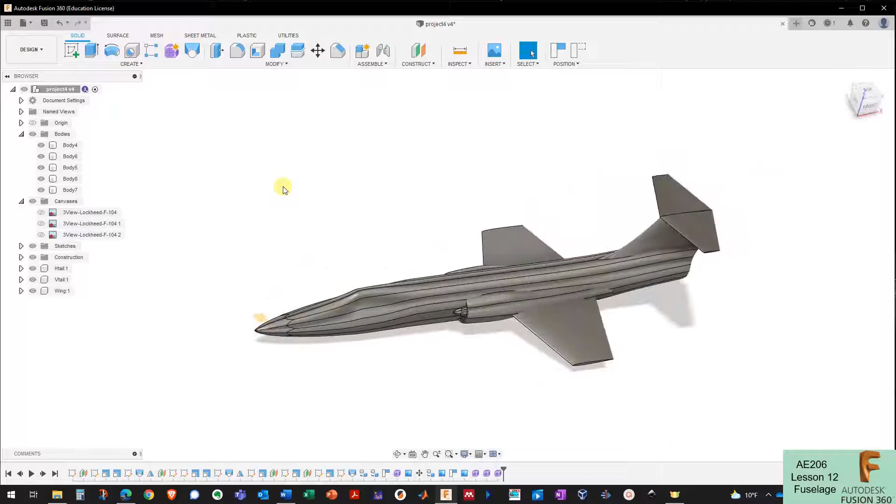So, you don't have to make a previously existing aircraft for Project 4. You can make any aircraft you want — make up a wing, make up a tail, make up a fuselage. You know what they say, if it looks right, it flies right. So just make up any aircraft you want, or model it after a previously existing aircraft like I did, using canvases, which is pretty easy to do, as you saw. So have fun, make your aircraft, and then in the next video we'll prepare it to go into the wind tunnel. Okay.